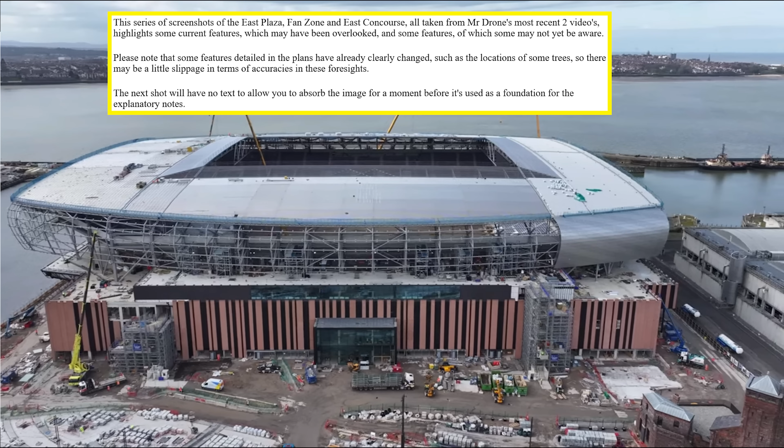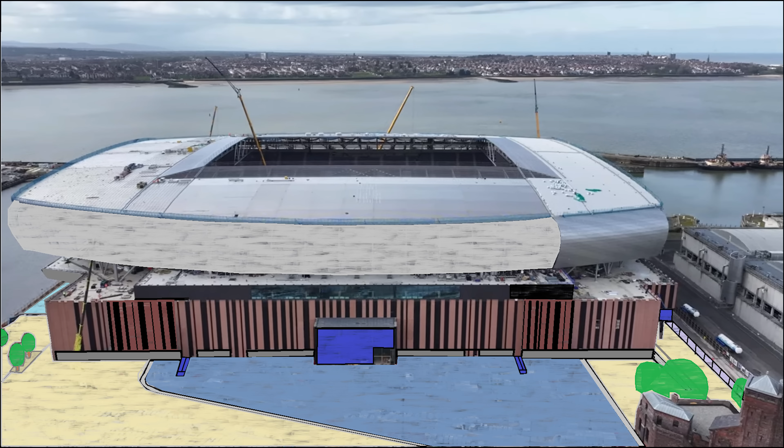The next shot will have no text to allow you to absorb the image for a moment before it's used as a foundation for the explanatory notes. So let's take a look at that next shot now. Okay, and that's the outline of it there, and we will move on now to the following sequence of shots with the explanatory notes. Let's go.

Okay, here we go. So please remember that this is not an accurate representation, but an approximate interpretation. The portals along the East Stand marked with the orange comprise a mixture of the following: 1. External faced turnstiles for entry to the ground floor internal concourse, which is in a horseshoe shape around the south, east and north stands. 2. Openings to turnstiles at an angle inside the entranceways, behind which are stairs and lifts to the upper tier internal concourse, with access to both the south and east stands. And for the record, there are 91 turnstiles around the four stands.

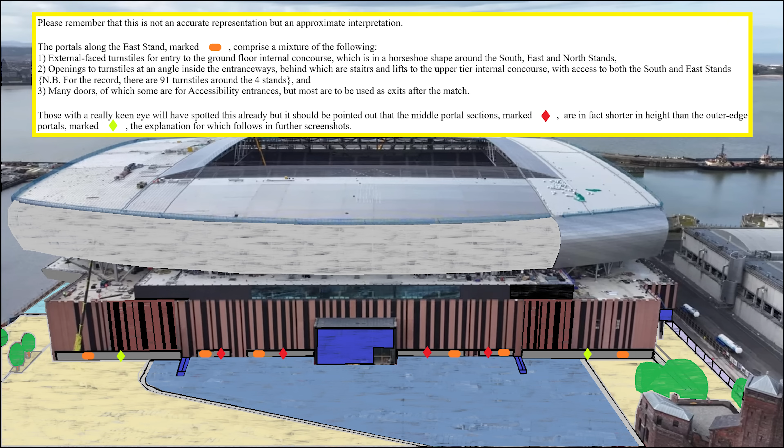And 3, many doors, of which some are for accessibility entrances, but most are to be used as exits after the match. Those with a really keen eye will have spotted this already, but it should be pointed out that the middle portal sections marked with the red diamond are in fact shorter in height than the outer edge portals marked with the green diamond. The explanation for which follows in further screenshots.

Okay, moving on, we have this one showing that most people will already know that the majority of the East Stand main portal over 2 floors is to be the new EFC Club shop, here marked with a white spot against a blue background. Entrance to it will be by 2 sets of double doors. The double doorway that is found at the bottom right of the main portal, marked with a green triangle, is the entrance for the East Stand hospitality lounges. You can see that down right in the centre of the stand at the bottom there, clearly marked with the white spot.

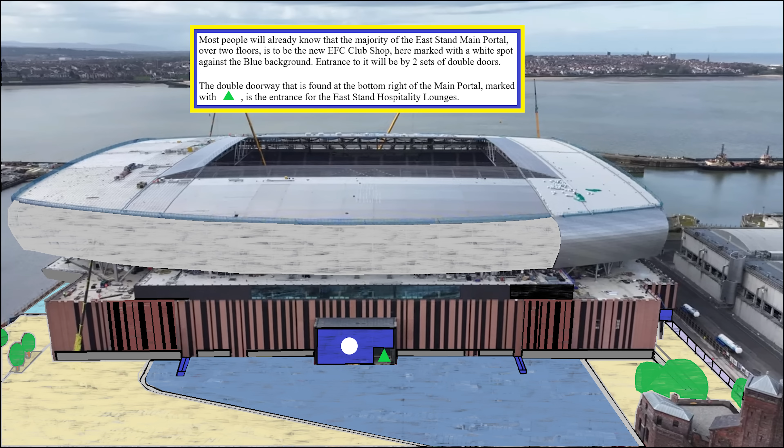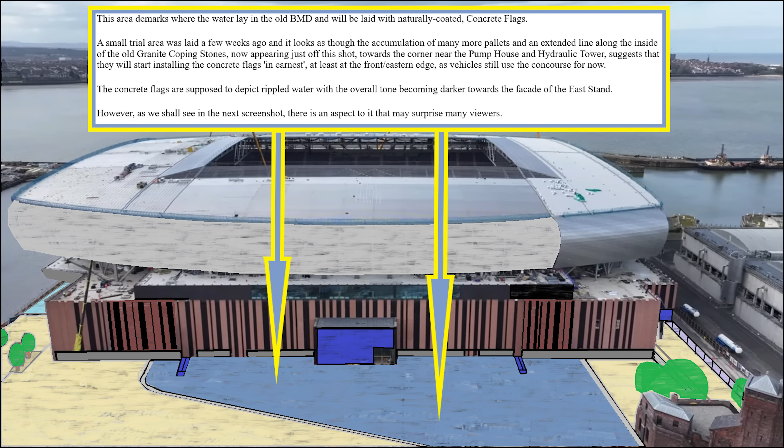Okay, this area, pointed down with the arrows, demarks where the water lay in the old Bramley-Moore dock and will be laid with naturally coated concrete flags. A small trial area was laid a few weeks ago, and it looks as though the accumulation of many more pallets and an extended line along the inside of the old granite coping stones, now appearing just off this shot, towards the corner near the pump house and hydraulic tower, suggests that they will start installing the concrete flags in earnest, at least at the front/eastern edge, as vehicles still use the concourse for now.

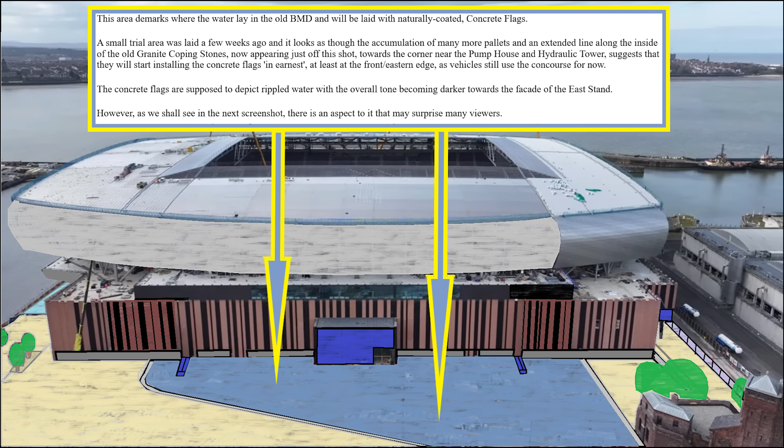The concrete flags are supposed to depict rippled water, with the overall tone becoming darker towards the facade of the east stand. However, as we shall see in the next screenshot, there is an aspect to it that may surprise many viewers. And there it is.

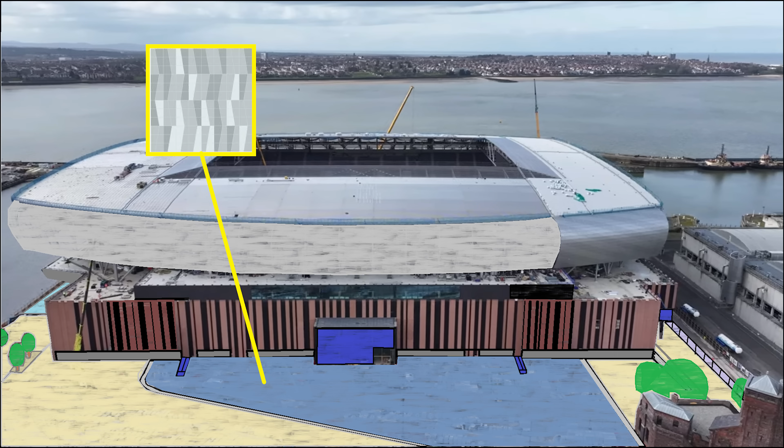Okay, moving on. This shows the area of the old Bramley-Moore Dock water is in fact not going to be all at one level. It will have a shallow gradient indicated here by white arrows, which, broadly speaking, drops down from the east stand main portal towards the old dock wall granite coping stones. This is why the outer general admission portals have more height, or are larger, take your pick, than the more central portals, and B, there is a natural break in the gradients provided next to the facade and in between the two different natured portals.

It's created by the installation of fan plaza seating plinths, marked here with the orange circles. Shots of what they will look like are provided on the next screenshot. Although not marked up here, it should also be noted that there is a very shallow gradient down from the base of the Regent Road wall to the dock wall granite coping stones.

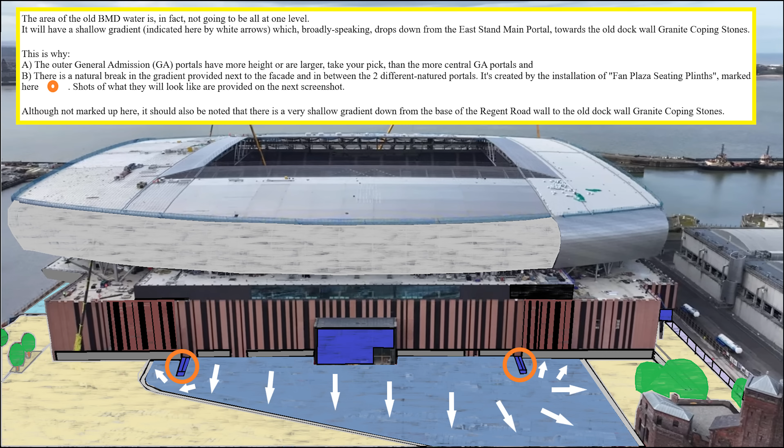The fan plaza seating plinths will be precast concrete and, like the concrete benches already installed on the plaza, they will be embossed. The embossing will not be the Leitch design, but mottos such as The People's Club and Nil Satis Nisi Optimum. The seating surfaces will have blue cobalt glazed tiles applied to them, and you'll see at the top there an overhead plan to the left, the horizontal plans of the plinths from both sides in the middle, and then the blue cobalt tiles at the top right.

Some excellent detail in that one.

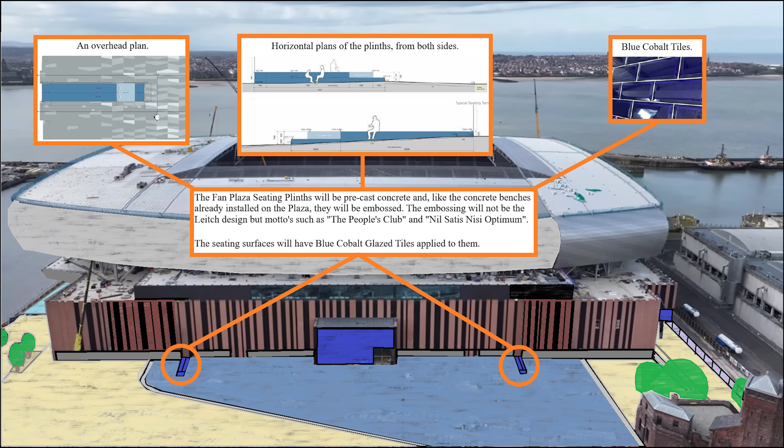There are a few points of interest to note at the northeast corner. One, a poorly drawn reminder that the north perimeter will have a 2-metre high steel meshed security fence installed at the edge of the new granite set's driveway, demarking the boundary with the United Utilities land.

Two, under the north stand overhang within the frame created by the horizontal beams of the black support posts, there will be wind mitigation baffles which will be branded, here shown in royal blue and circled with orange.

Three, besides the row of trees that will line the area along the northern perimeter to the north of the pump house and hydraulic tower, there is to be a border for several more trees and grasses between the west edge of the pump house and the northeast corner general admission entrance portals.

Four, the vehicular driveway from the security hut to the overhang is actually at a slightly higher level than the concourse at the northeast corner. So there is a set of shallow steps and seating plinth, marked with the red circle, between the trees and grasses bed and the northeast corner of the stand.

Just leave that there for a second because there's quite a lot of information there.

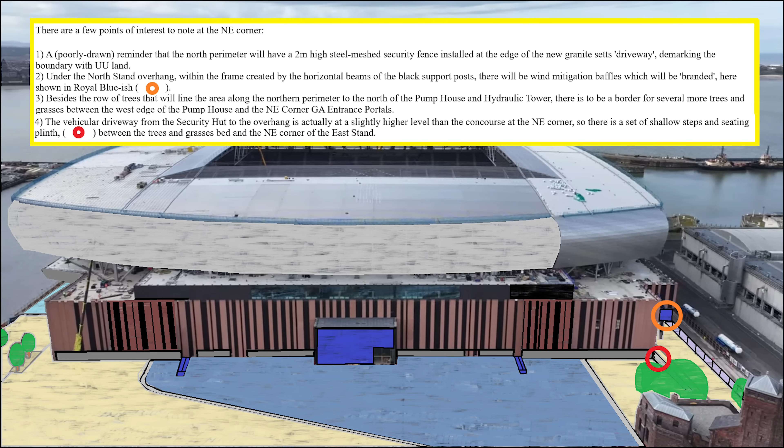Okay, the final shot using this foundation still just points out a couple of points of interest at the southeast corner of the stadium, where the East Plaza meets the southern concourse.

There will be some shrubbery or a short length of hedge along some of the south-southeast perimeter, where the current fence is between the site and the Laing O'Rourke offices along Nelson Dockside.

Some of the black balustrades have already been installed along the Nelson Dockside, westwards from the southeast corner.

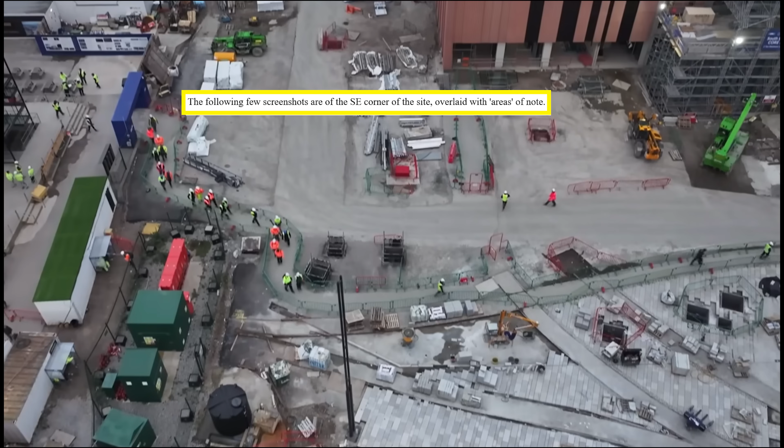Okay, a different angle here, which shows the following few screenshots are of the southeast corner of the site, overlaid with areas of note.

Remember, we're looking at the southeast corner here, and this whole area of the East Plaza will largely be considered to be the home fans' gathering space on match days.

The plans state that there will be a mixture of half-sized sea container structures and large umbrellas covering food, drink and entertainment outlets on match days. The sea containers will have sides that open out and be fully self-contained and kitted out.

Exactly where they go will be trialled within the first few weeks of the first season, but they are flexible and can be moved. Initial plans suggest that the 3 or so sea containers will be placed between some of the trees or along the south-southeast security fence.

On non-match days only, it's possible that some of this area may be used as backup car parking.

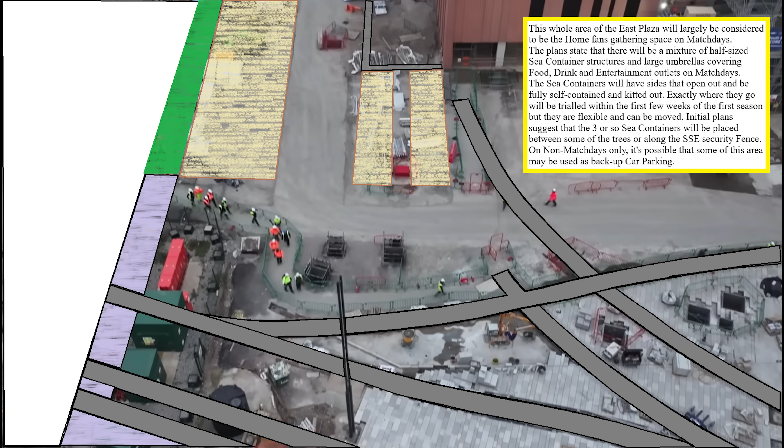These yellow hatched areas are for rows of trees. They are not open-earthed borders, but buried ArborSystems with wide, gapped, new granite sets of different colour tone from the main greyish granite seen over most of the plaza.

The plan stated that there will be 4 species of trees used, comprising Scots pine, as per the single sample tree already installed further up the plaza, Italian alder, Dawn redwood, and columnar elm on a mix and match basis. That was testing me there with those tree names.

At this southeast corner, they are part of the wind mitigation scheme, basically mirror imaged at the southwest corner of the south stand. The trees will have their trunks surrounded by a combination of perforated steel wind baffles, some with way signage or themed images, and also some single steel seats incorporated into them.

Some ideas of these are portrayed on the next shot. The pattern of the trees' locations are shown here with the star-shaped green as a rough guide only.

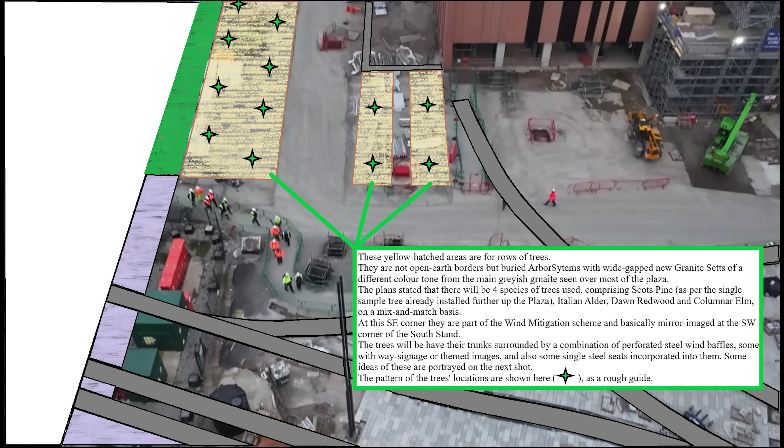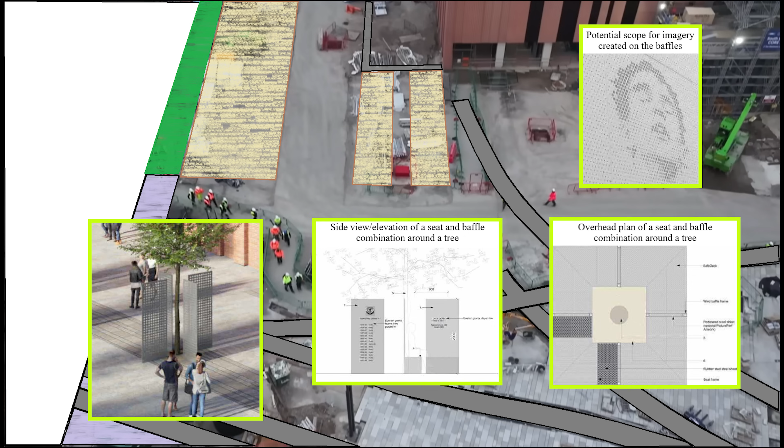Moving on, this green hatched area is shown on the plans as a shrub border or hedging. I'm still looking at the south-east corner, going up the back of the south stand. These purple hatched areas further down are where reclaimed cobble setts will be installed around the perimeter.

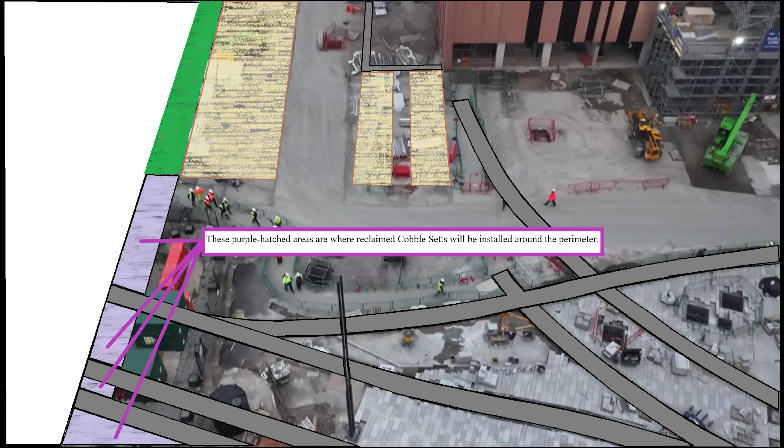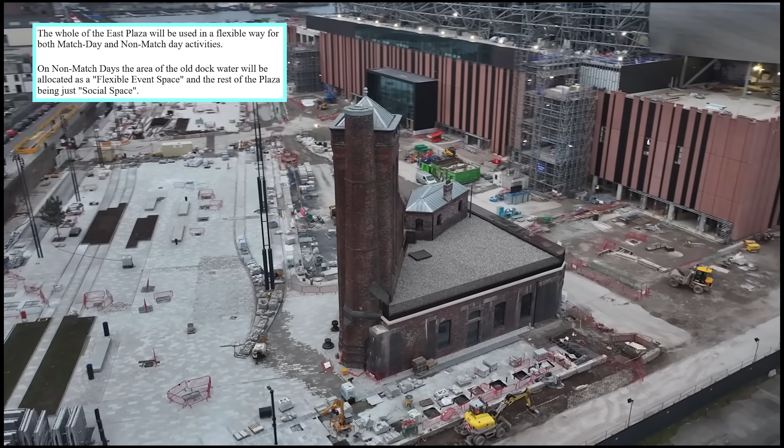Moving on, a different angle here, looking from the north-east corner over the hydraulic tower. The whole of the East Plaza will be used in a flexible way for both match day and non-match day activities. On non-match days, the area of the old dock water will be allocated as a flexible event space, with the rest of the plaza as social space. On match days, the whole of the East Plaza will become a fan zone, with areas allocated to food, drink and retail outlets in vans or sea containers.

The four allocated areas for the vans and containers are indicated here with the red blotches. Just let you take in those areas there.

There will also be some areas allocated for entertainment on match days, which will include some marquees and gazebos, but also a stage, which is best shown in a different, later view of the plaza.

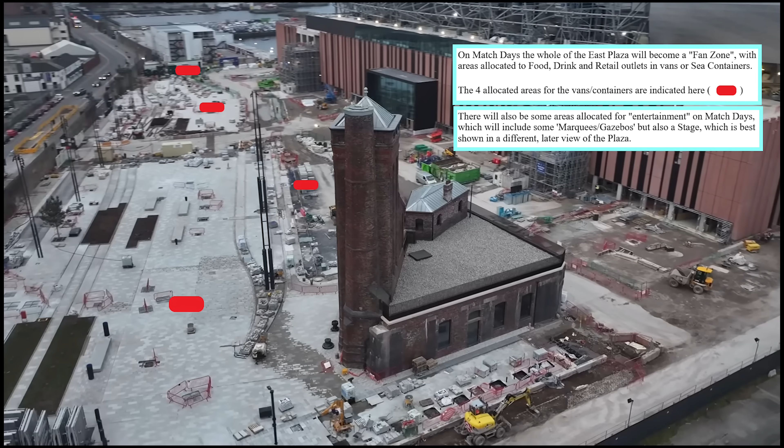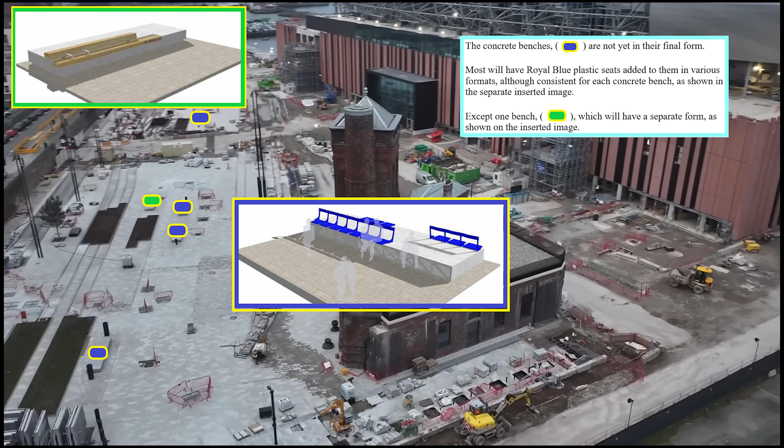The concrete benches, shown in dark blue, are not yet in their final form. Most will have royal blue plastic seats added to them in various formats, although consistent for each concrete bench, as shown in the separate inserted image, except one bench, marked in green, which will have a separate form, as shown on the inserted image.

It's difficult to capture the whole plaza in one shot, so it's not possible to show all the tree locations and exact numbers, but these are the best guesses, excluding the trees indicated already on the previous shot at the south-east corner, marked in green. All the borders containing earth will be planted up with a large spread of decorative grass species, which may create the impression of waves in the wind at times.

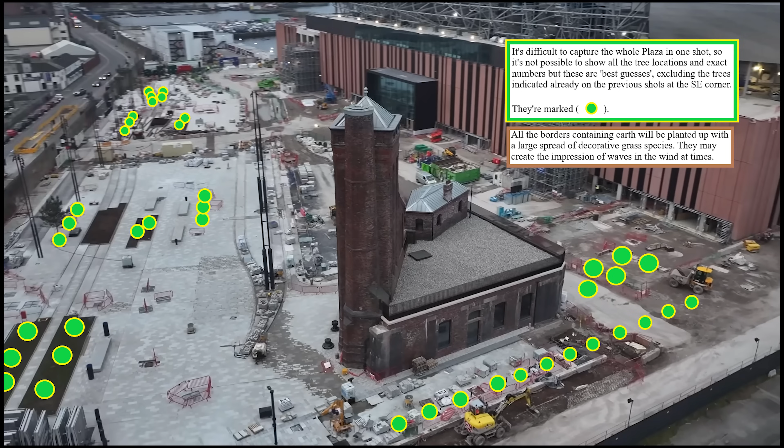Moving back to the view from the south-east corner now, looking right across the East Plaza. This cobbled area will have bicycle stands along most of its length, as will the next section beyond the central cut-through. These are in addition to the double-tiered covered bicycle stand towards the northern end, which was installed months ago.

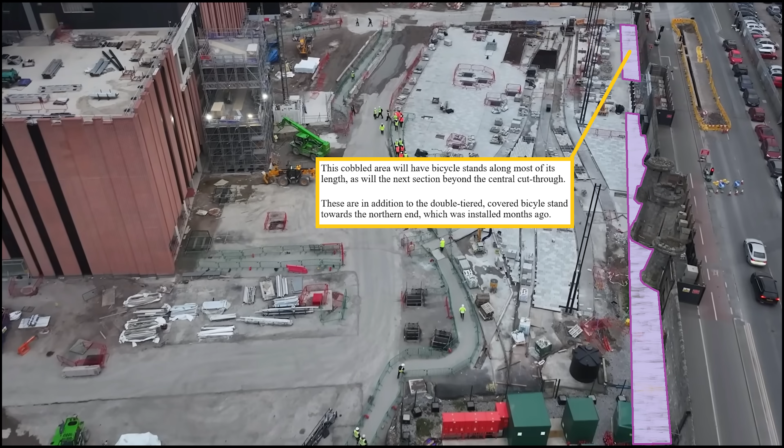It's marked in the purple shading there. The Regent Road wall tower gates will have new steel mesh gates in the same style as the cut-throughs, added to the inside edge of them, for use only in emergencies or special events. Otherwise, the site will be open access and the retractable bollards between the towers will control vehicular access.

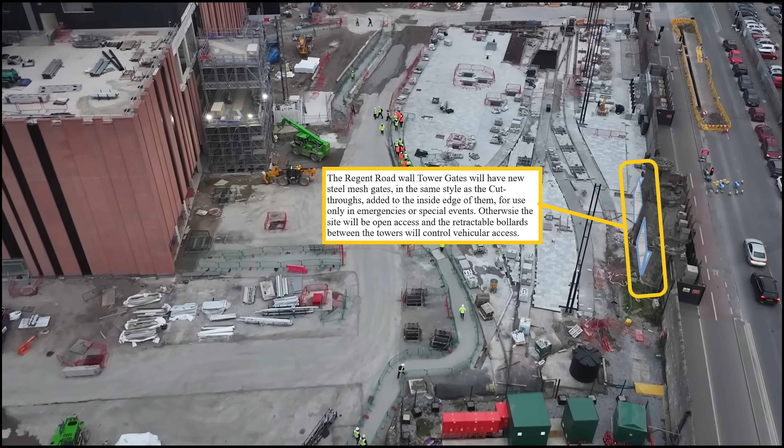Except for the cut-throughs, which will have new granite Setts laid there, the border line of cobbles will continue along the inside of the Regent Road wall.

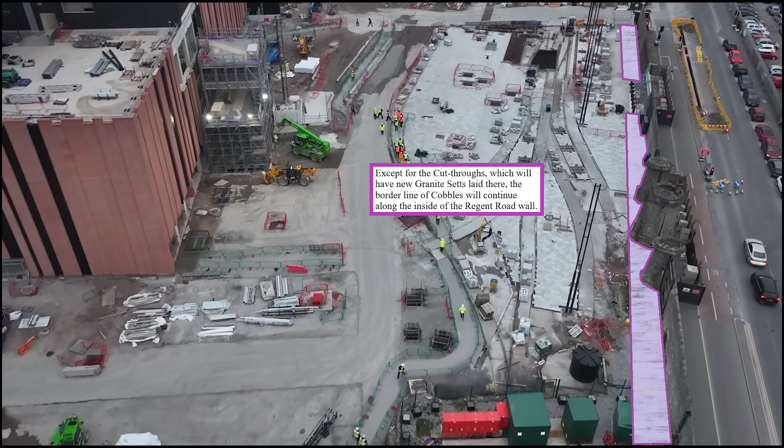And that brings us right to the end of the images.